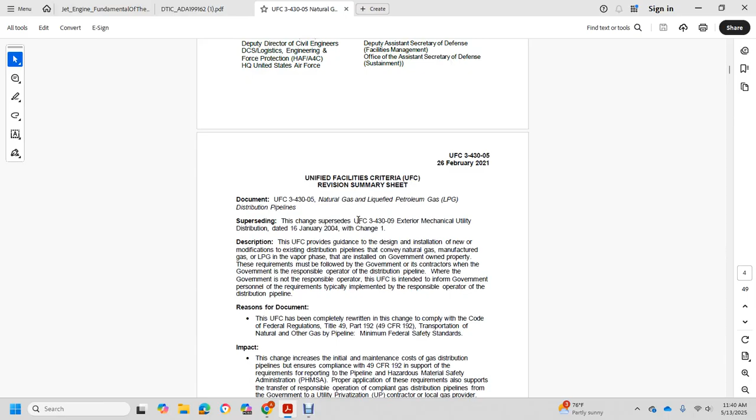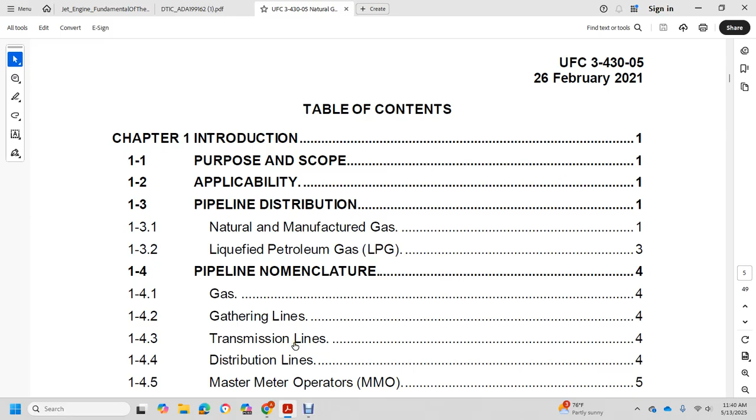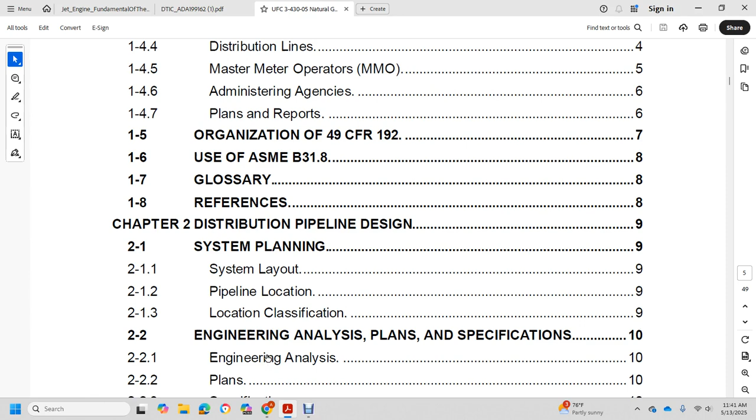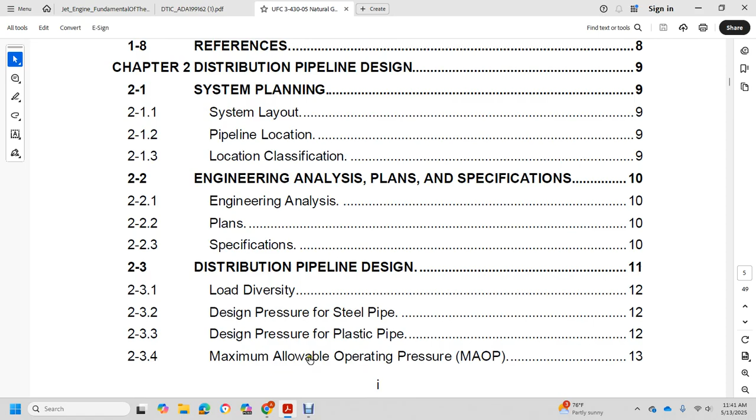Chapter 1. Introduction, Purpose, Scope, Applicability, Pipeline Distribution, Natural and Manufactured Gas, Liquefied Petroleum Gas, Pipeline Nomenclature, Gas Gathering Lines, Transmission Line, Distribution Lines, Master Meter Operators, Administering Agencies, Plan Reports. 1-5 Organization of Title 49 CFR 192, Use of American Society of Mechanical Engineers B31.8, and Glossary, References. Chapter 2, Distribution Pipeline Design, System Planning, System Layout, Pipeline Location, Location Classification, Engineering Analysis, Plan Specification, Distribution Pipeline Design, Load, Diversity, Design Pressure for Steel Pipe.

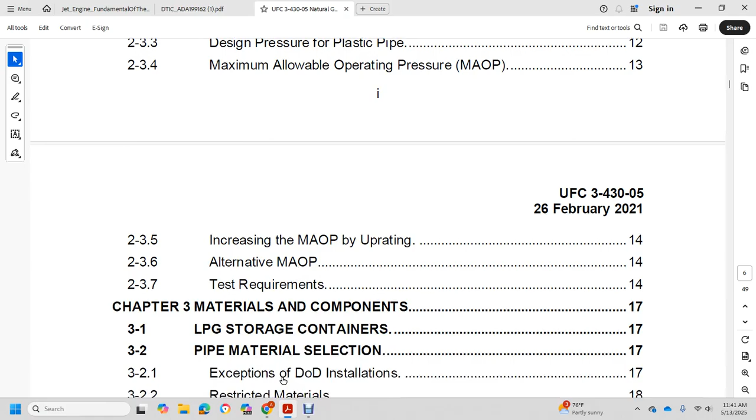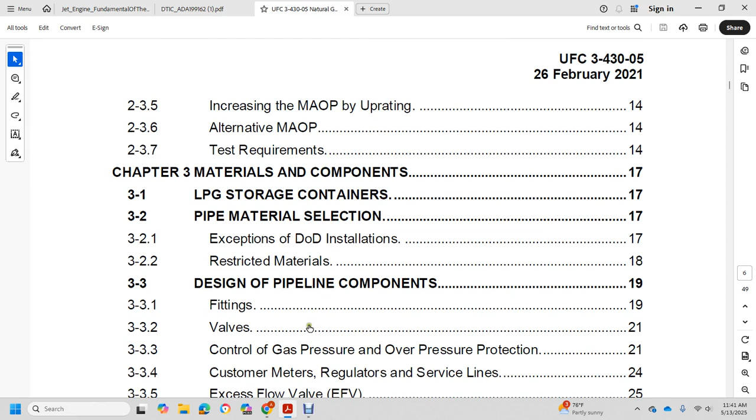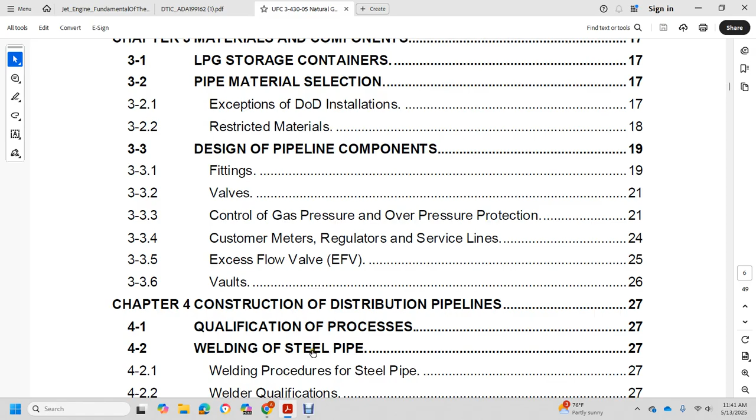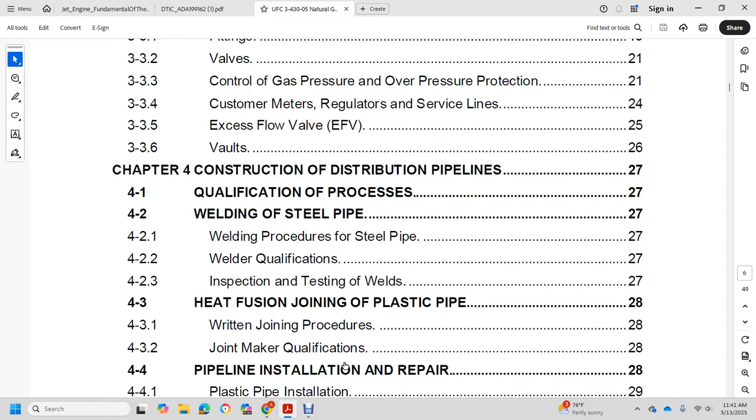Design Pressure for plastic pipe, Maximum Allowable Operating Pressure, Increase of the maximum allowable operating pressure by uprating, alternative maximum allowable operating pressure, test requirements. Chapter 3, Material Components, Liquefied Petroleum Gas Storage Container Pipeline Material Selection, Exceptions of DoD Installations, Restricted Materials Design, Pipeline Components, Fittings, Valves, Control Gas Pressure, Overpressure Protection, Customer Meters, Regulators, Service Lines, Excess Flow Valves, Vaults. Chapter 4, Construction, Distribution Pipelines, Qualification Process, Welding of steel pipe, Welding Procedure, Steel Pipe, Welder Qualifications, Inspection and Testing of welds, Heat Fusion Joining, Plastic Pipe, Written Joining Procedures, Joint Maker Qualification.

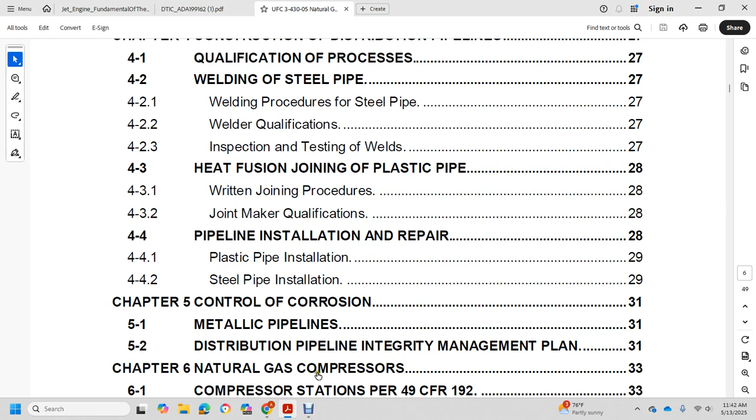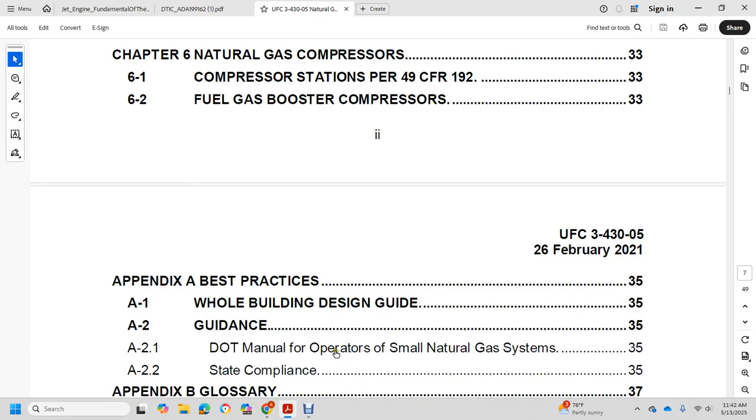Pipeline Installation and Repair, Plastic Pipe Installation, Steel Pipe Installation. Chapter 5, Control of Corrosion, Metallic Pipelines, Distribution Pipeline Integrity. Chapter 6, Natural Gas Compressor Stations, per 49 CFR 192, Fuel Gas Booster Compressors. Appendix A, Best Practice, Whole Building Design Guidance and DOT Department of Transportation Manual Operator Small Natural Gas System State Compliance. Appendix B, Glossary, Acronyms, Appendix C, References and Figures.

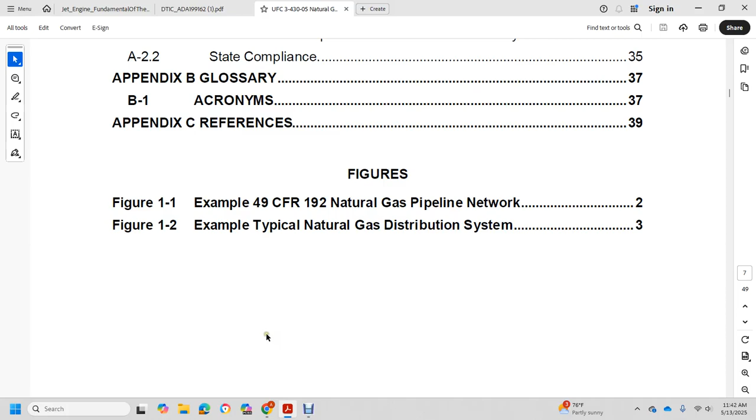Example for Title 49 CFR 192 Natural Gas Pipeline Network. Example of Typical Natural Gas Distribution System.

This page is intentionally left blank.

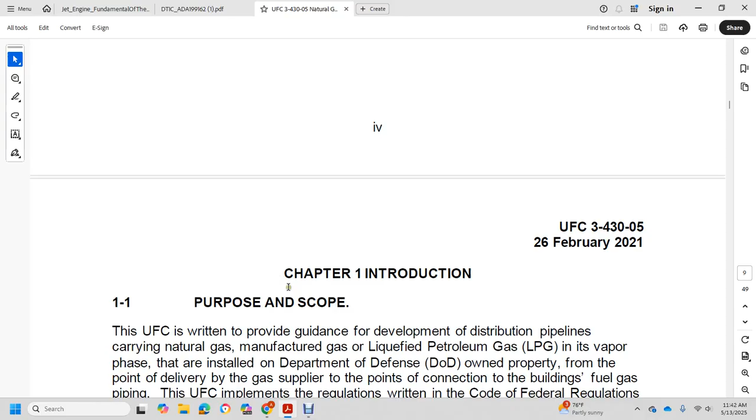Chapter 1, Introduction, Purpose, and Scope. This UFC is written to provide guidance for development of distribution pipelines carrying natural gas, manufactured gas, and liquefied petroleum gas as vapor phase. They are installed on Department of Defense owned property, from the point of delivery of the gas supply to the point of connection to building fuel gas piping.

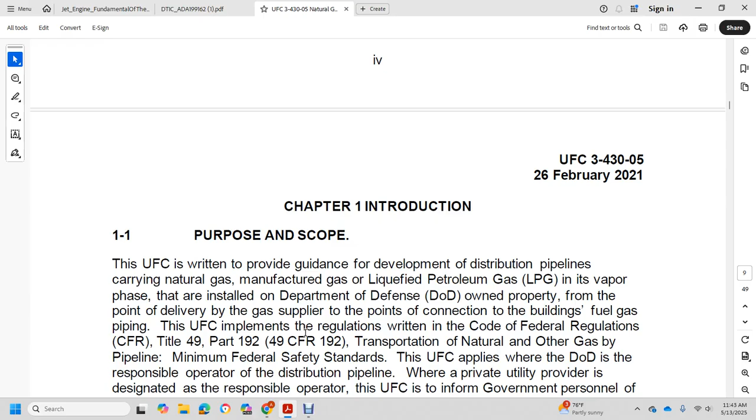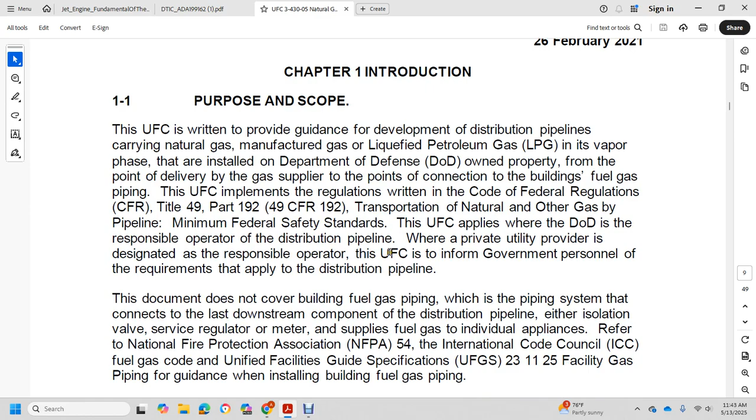This UFC implements regulation within the Code of Federal Regulations, Title 49, Part 192, Transportation of Natural and Other Gas by Pipeline, Minimum Federal Safety Standards. The UFC, as applied within DoD, is for the responsible operator of distribution pipelines, where a privately owned utility provider is designated as the responsible operator. This UFC is intended to inform government personnel of the requirements applicable to distribution pipeline documents.

It does not cover building fuel gas piping systems that connect the last downstream component of a distribution pipeline, either an isolation valve, service regulator, or meter, to supply fuel gas to individual appliances. Reference National Fire Protection Association 54, International Code Council ICC Fuel Gas Code, and Unified Facility Guide Specifications 23 11 25 Facility Gas Piping for guidance when installing fuel gas piping.

This document does not cover systems used to convey liquefied petroleum gas in its liquid phase. Refer to Title 49 CFR 195 and UFC 3-460-01 for liquid phase liquid petroleum gas pipeline transfer systems, and to National Fire Protection Association 58, International Code Council Fuel Gas Code, and Unified Facility Guide Specification 23 11 25 Facility Gas Piping for guidance when installing a single liquid petroleum gas storage tank or liquid petroleum gas service to a single building.

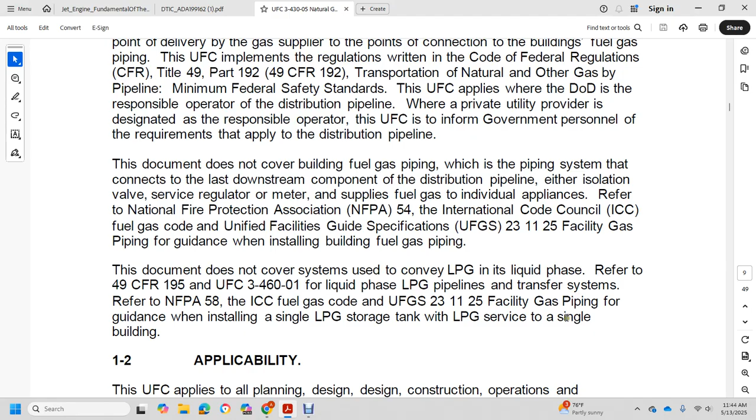1-2 Applicability. The UFC applies to all planning, design, construction, operation, and maintenance of gas distribution pipelines and all appurtenances wherever the DoD is the responsible operator.

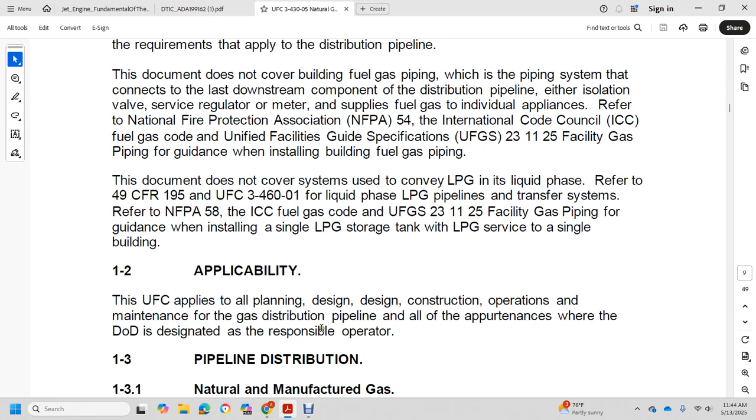1-3 The pipeline distribution. 1-3-1 Natural gas and manufactured gas. Regulation Title 49 CFR 192 applies to every part of the gas pipeline, from the point of gas production to connection with the service line components of the building fuel gas piping system. An electronic version of Title 49 CFR 192 can be found on the electronic CFR website.

Under Title 49 CFR 192, three distinct types of pipeline are described: gathering pipelines, transmission pipelines, and distribution pipelines. See Figure 1-1 for a graphical representation of Title 49 CFR 192 natural gas pipeline systems.

Gathering pipelines are not under the authority or scope of the UFC. Transmission pipelines are typically owned and operated by gas suppliers and not covered by this UFC, though transmission lines installed on Department of Defense installations are under easement with the Department of Defense to a responsible owner.

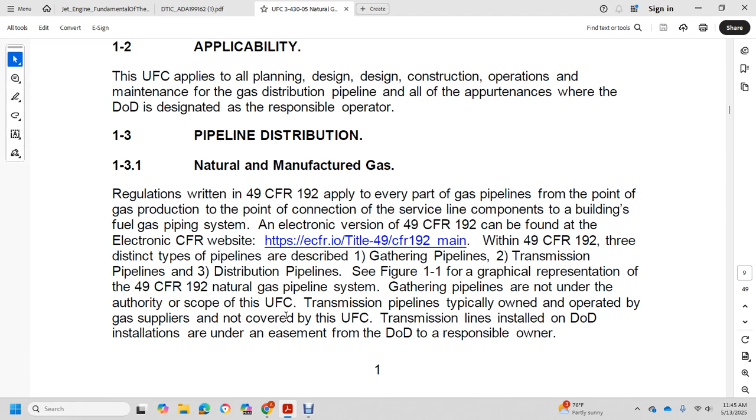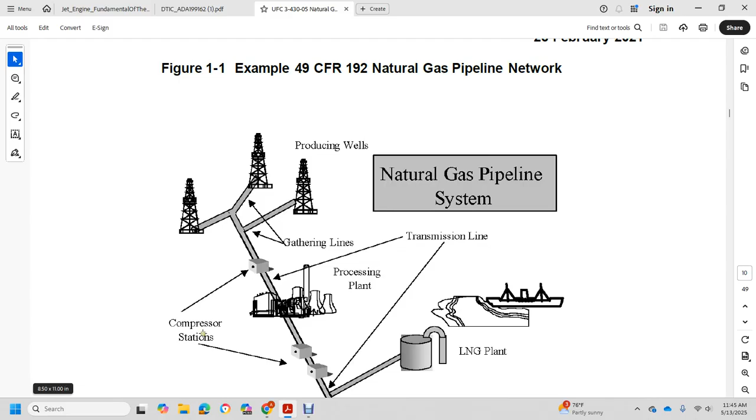Example of Title 49 CFR 192 natural gas pipeline: production wells, gathering lines, natural gas pipeline transmission lines, processing plant, compressor stations, liquid natural gas plant, underground storage, city gate, large volume customer, distribution system meters, and regulators.

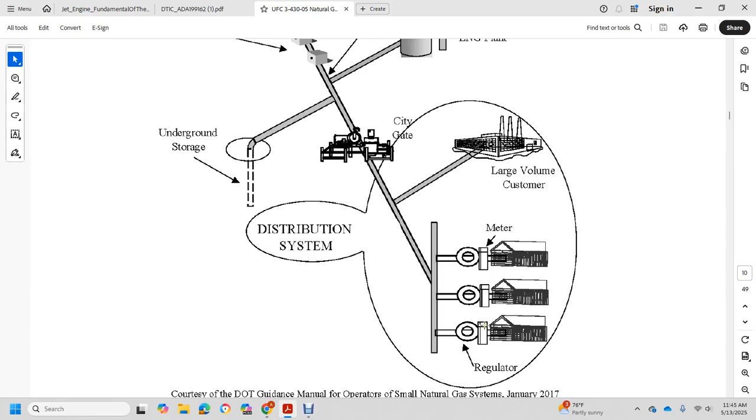Gas pipelines for which the Department of Defense is the responsible operator are typically classified as distribution pipelines. characterized as a pipeline that receives gas from a gas utility purveyor who delivers, meters, and regulates the pressure of gas supplied to the distribution pipeline located on the Department of Defense installation.

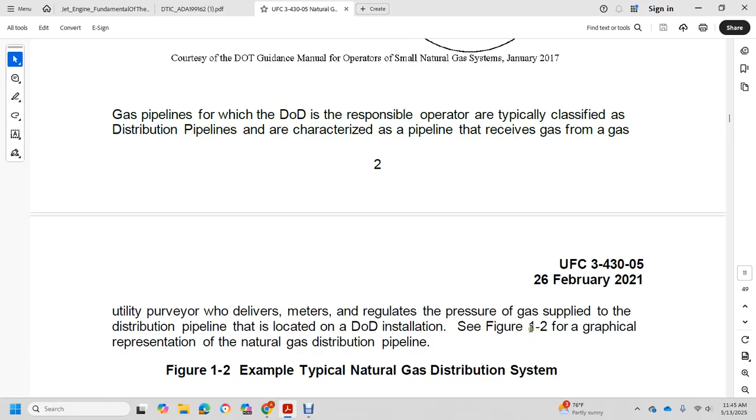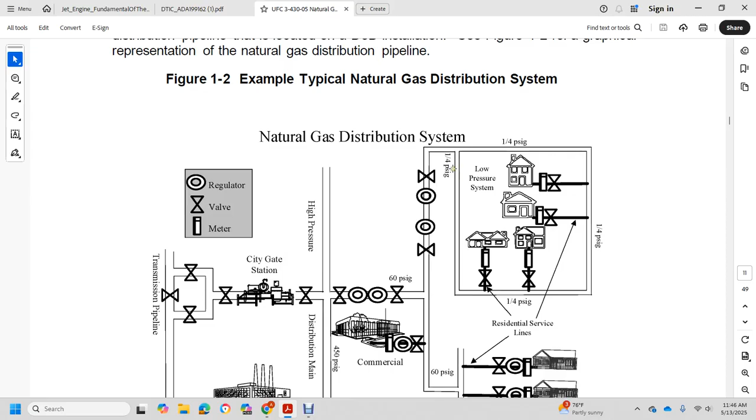1-3-2 Liquefied petroleum gas, or LPG. Title 49 CFR 192 applies to liquid petroleum gas distribution pipelines conveyed in liquid petroleum gas vapor phase. The pipeline conveying liquid petroleum gas in liquid form is not covered under Title 49 CFR 192, but is regulated under Title 49 CFR 195.

Transportation of hazardous liquids by pipeline, Title 49 CFR 195, 195.1(b)(1), provides an exception to applicability for any hazardous liquid transported in a gaseous state. This exemption implements by default Title 49 CFR 192 as the regulating document. Title 49 CFR 192.11 refers to the vapor phase with liquid petroleum gas.

Petroleum gas pipelines are regulated under Title 49 CFR 192 and National Fire Protection Association 58, with National Fire Protection Association 58 prevailing in the event of conflict.

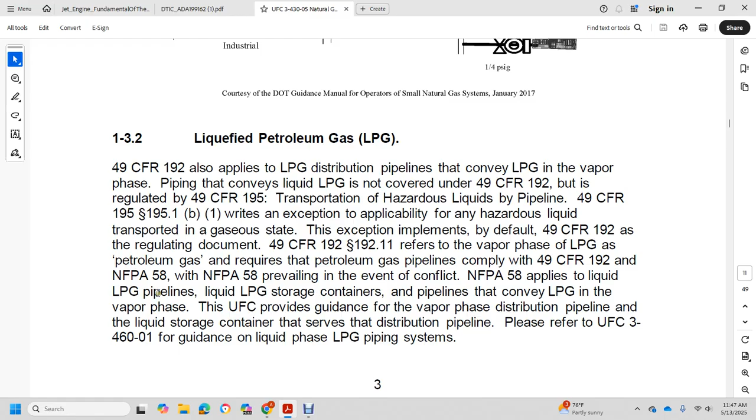National Fire Protection Association 58 applies to liquid petroleum gas, liquid petroleum storage containers, pipeline conveyed liquid petroleum gas in the vapor phase. This UFC provides guidance on vapor phase distribution pipelines and liquid storage containers that serve the distribution pipeline. Please refer to UFC 3-460-01 for guidance on liquid petroleum gas piping systems.

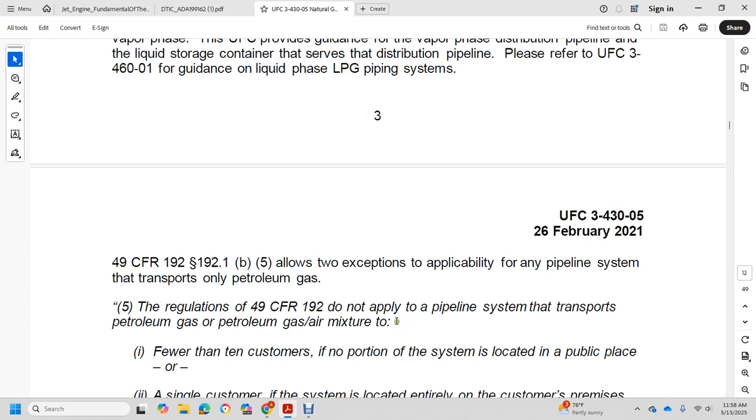Title 49 CFR 192.1 B5 allows two exemptions of applicability for any pipeline system that transports only petroleum gas. The regulations of Title 49 CFR 192 do not apply within a pipeline to a pipeline system that transports petroleum gas-air mixture to fewer than 10 customers, if no portion of the system is located in a public place, or a single customer and single system located on the customer's premises, regardless of whether the system is located in a public place.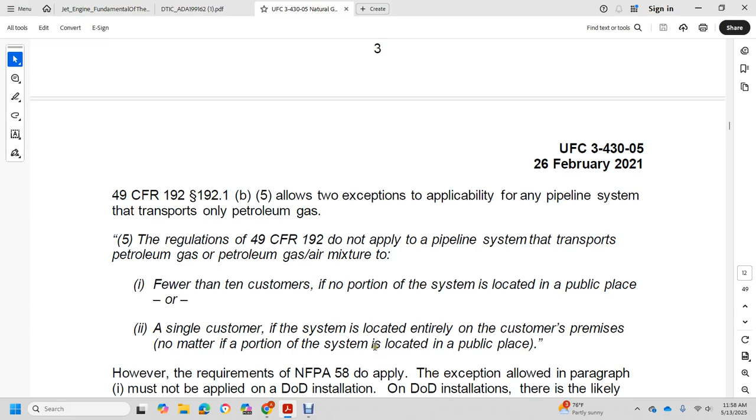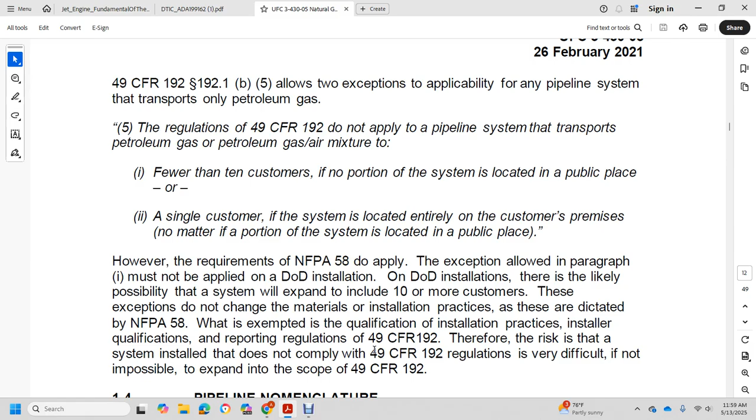However, the requirement to apply the National Fire Protection Association exemption in paragraph 1 must not be applied to DoD installations. On DoD installations, there is a likely possibility the system will expand to include 10 or more customers. These exceptions do not change the material or installation practices dictated by NFPA 58. The exceptions for qualification, installation practices, installer qualification, and reporting regulations remain under Title 49 CFR 192. Therefore, if a system installed does not comply with Title 49 CFR 192 regulation, it is very difficult, if not impossible to expand the scope under Title 49 CFR 192.

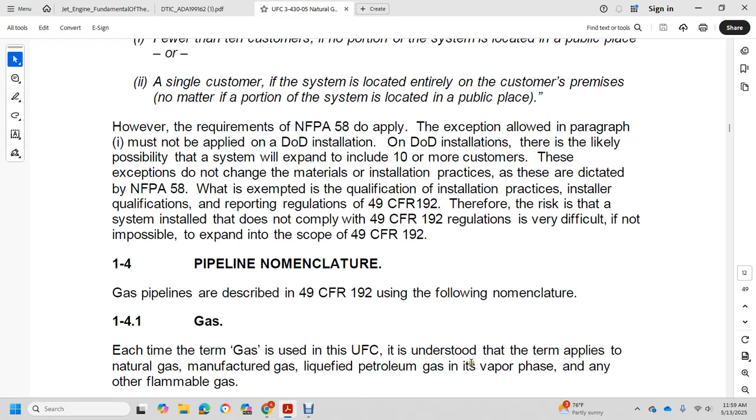Section 1.4 covers pipeline nomenclature. Gas pipelines are described in Title 49 CFR 192 with the following nomenclature. 1.4.1 Gas: each time the term gas is used in the UFC, it applies to natural gas, manufactured gas, liquefied petroleum gas in its vapor phase, and any other flammable gas. 1.4.2 Gathering lines: these transport gas from the gas production facility.

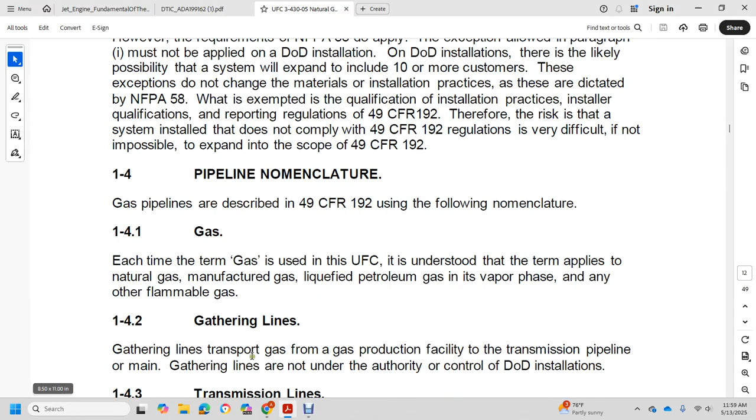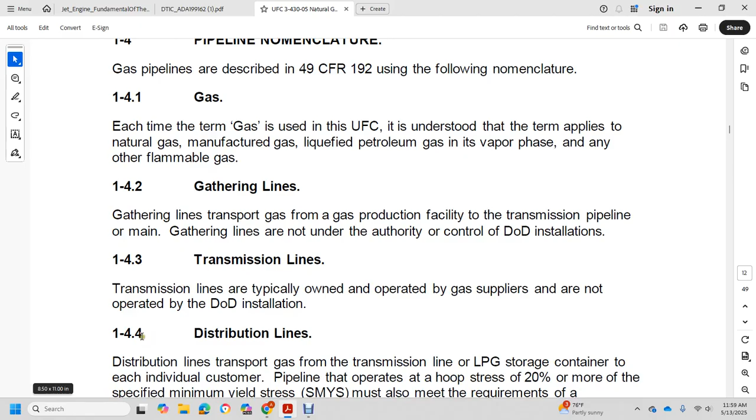Transmission lines remain under the authority, while gathering lines are not under the authority or control of the Department of Defense installation. 1.4.3 Transmission lines are typically owned and operated by the gas supplier and not operated by the DoD installation. 1.4.4 Distribution lines transport gas from the transmission line or liquefied petroleum gas storage container to each individual customer.

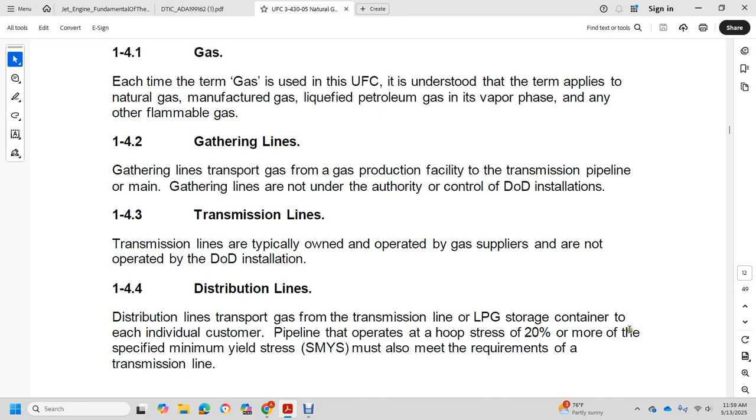A pipeline that operates at a hoop stress of 20% or more of the specified minimum yield stress must also meet the requirements of a transmission line. 1.4.4.1 Main: a main is defined as a distribution line serving more than one service line.

Note that Title 49 CFR 192 subpart G appears to apply to transmission pipelines, because it is entitled 'General Construction Requirements for Transmission Lines and Mains.' However, the Title 49 CFR 192 scope of the mains requirement applies to distribution pipelines.

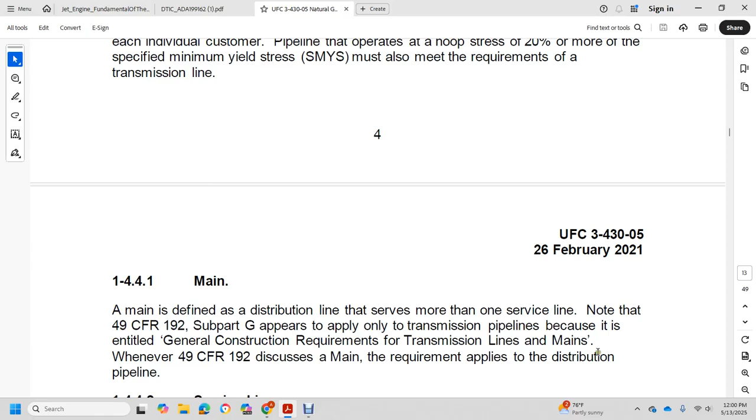1.4.4.2 Service line: a service line is a distribution line that transports gas from the main to the individual customer meter, regulator, or isolation valve upstream of the customer piping. Note that this pipe point of connection is the demarcation between the pipeline governed by Title 49 CFR 192 and the fuel gas piping governed by the National Fire Protection Association 54.

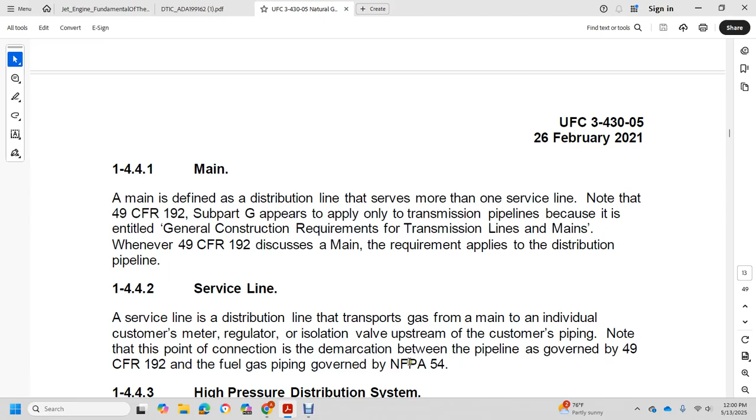1.4.4.3 High pressure distribution system: a distribution system operated with gas pressure in the main higher than the pressure provided to the customer. 1.4.4.4 Low pressure distribution system: a distribution system operated with gas pressure in the main substantially the same as the pressure provided to the customer. Refer to Title 49 CFR 192 §195.3 for the official definitions of each of these terms.

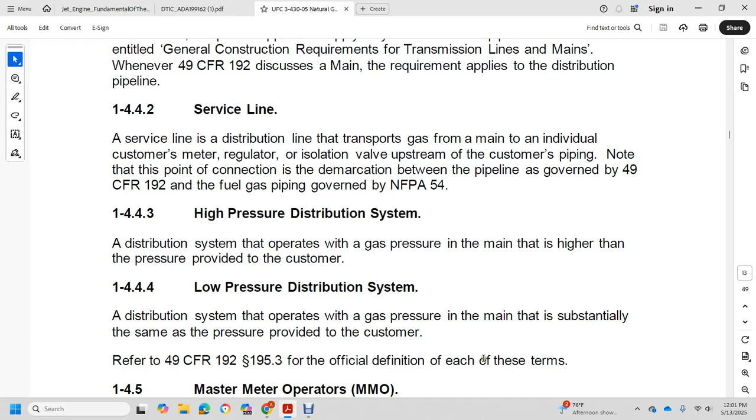1.4.5 Master meter operator: a small natural gas distribution system, sometimes designated as a master meter system. This designation is typically reserved for owners of apartments, buildings, trailer parks, or other types of property. Meaning, Title 49 CFR 192 refers to the MMO, the operator of the master meter system, but does not provide clearly defined criteria for determining who is and who is not an MMO or master meter operator under the reporting regulation.

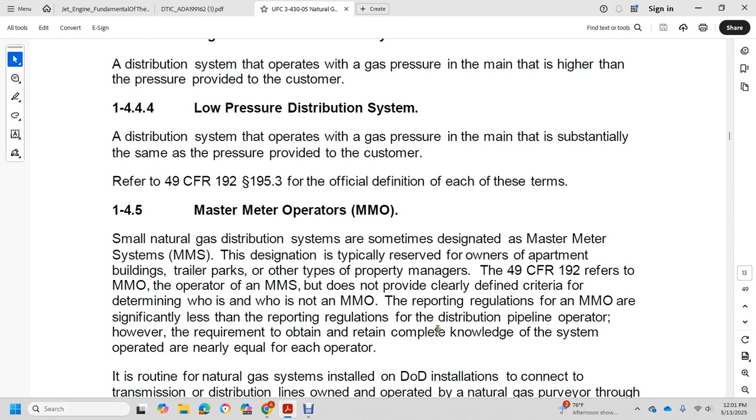The master meter operator has significantly less reporting regulation than a distribution pipeline operator. However, the requirement to obtain and retain complete knowledge of the system operated is nearly equal for each. The transmission natural gas system installed at a DoD installation connects with transmission and distribution lines owned and operated by a natural gas purveyor through a metered and pressure-regulated connection. Because of this method of connection, with limited reporting, engineers or contractors operating the system sometimes attempt to claim the natural gas distribution system is a master meter system. No natural gas systems installed at a DoD installation shall be considered a master meter system without express written approval from the authorized administrator of the applicable regulation.

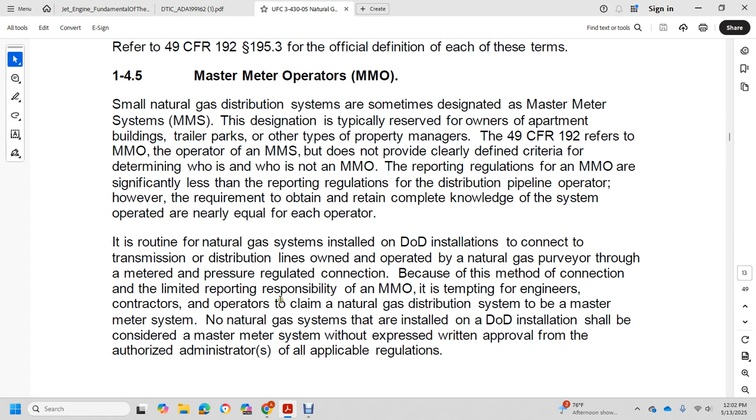1.4.6 Administering Agencies: the Pipeline and Hazardous Materials Safety Administration is assigned, with the Administrator under Title 49 CFR 192 tasked with enforcing the regulations presented therein. Transmission line operators and distribution line operators are required by regulation to report specific information to the Pipeline and Hazardous Materials Safety Administration, with the reporting regulation being more detailed for transmission line operators than for distribution line operators.

Nonetheless, the distribution line operator is required to report to PHMSA. The report requires the pipeline operator to obtain and retain complete knowledge of each pipeline segment and component installed in the system. The operator is responsible for details of the plans, procedures, and reports, which must be available for PHMSA review of the distribution pipeline as defined in Title 49 CFR 192, subparts L and P.

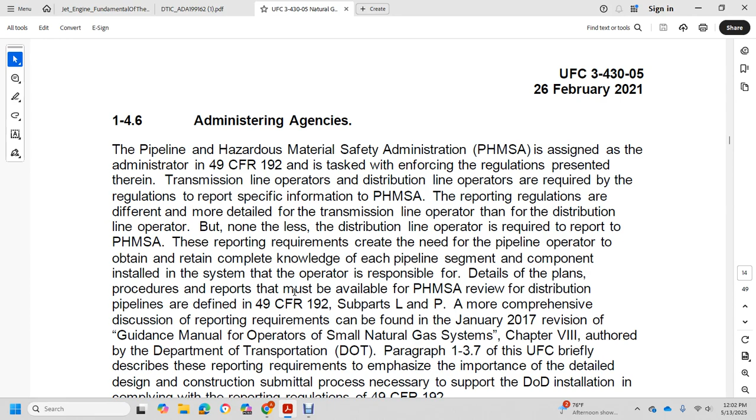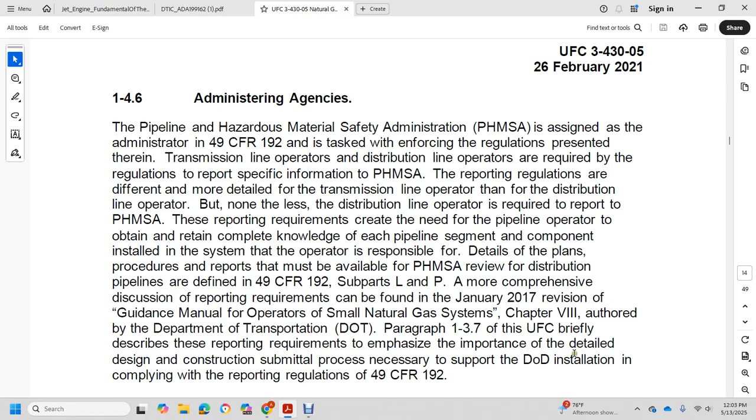A more comprehensive discussion of reporting requirements can be found in the January 2017 revision of the Guidance Manual for Operators of Small Natural Gas Systems, Chapter 8, authored by the Department of Transportation, paragraph 1-3.7, which briefly describes the reporting requirements and emphasizes the importance of detailed design and construction submittal processes necessary to support DoD installations complying with the reporting regulation Title 49 CFR 192.

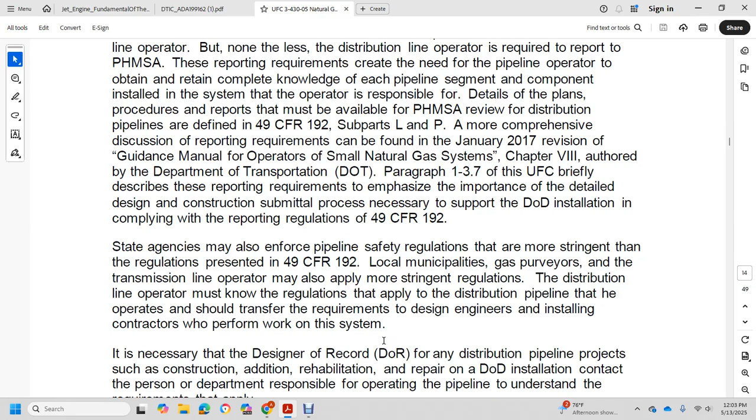State agencies may also enforce pipeline safety regulations more stringent than those presented in Title 49 CFR 192. Local municipality gas purveyors and transmission line operators may also apply more stringent regulations. Distribution line operators must know the regulations that apply to the distribution pipeline and should transfer these requirements to design engineers and installing contractors who perform the work on the system.

It is necessary for the Designer of Record of any distribution pipeline project, such as construction, addition, rehabilitation, or repair, for the DoD installation to contact the person or department responsible for operating the pipeline to understand the requirements that apply.

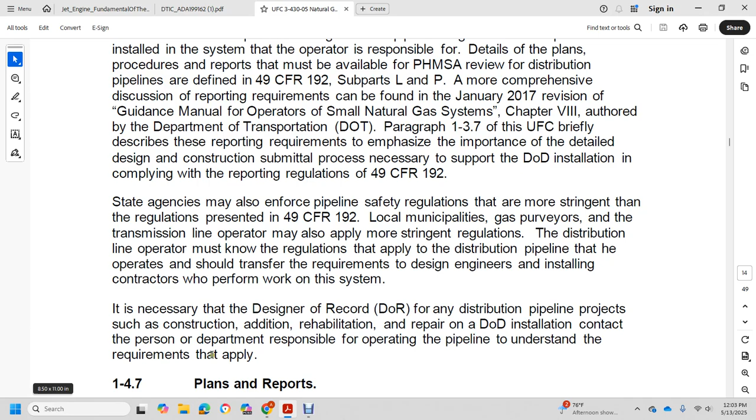1-4.7, Plans and Reports. All gas pipeline operators are required to maintain a number of plans for the safe operation of the pipeline. These contain information relevant to the work performed on the gas distribution pipeline. Civil Department of Defense installations must provide a reasonable record of the design and construction process in order to support ongoing plan reporting efforts required for the responsible operator and the Department of Public Works.

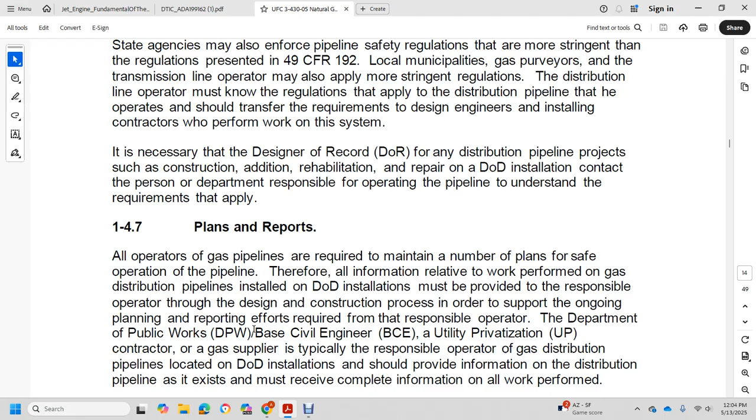A base civil engineer utilizing a privatization contractor as the gas supplier is typically responsible for operating the gas distribution system located on the Department of Defense installation, and should provide information on the distribution pipeline as it exists, receiving complete information on all work performed. Plans required for the distribution pipeline operator are listed below to indicate the necessary thoroughness of the information that must be made available.

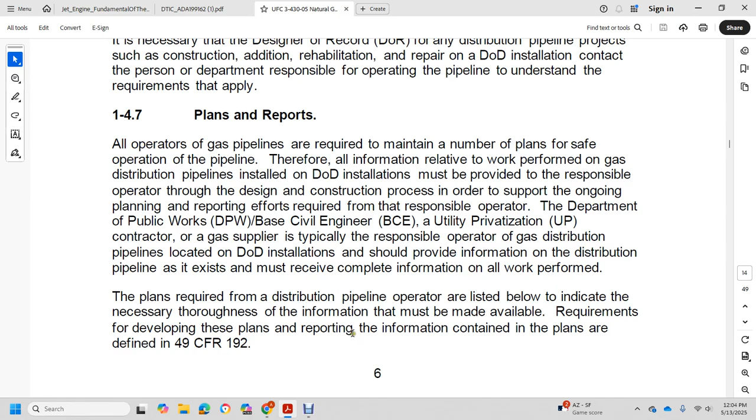The requirements to develop these plans and report the information contained within them are defined in Title 49 CFR 192. Operating and maintenance plans, Parts L and M, consist of 27 procedures covering all aspects of installing, operating, and maintaining each pipe segment component.

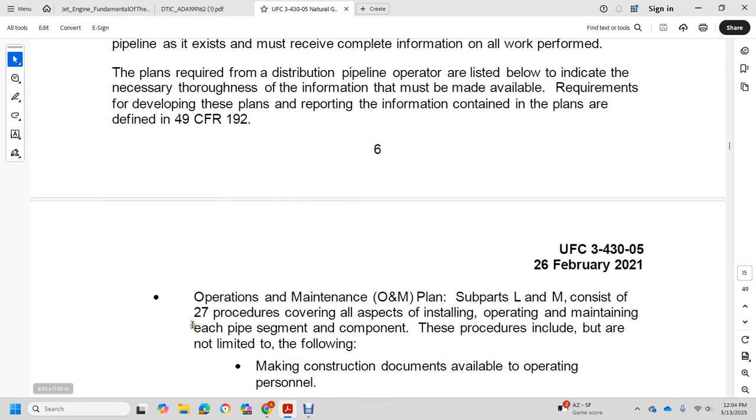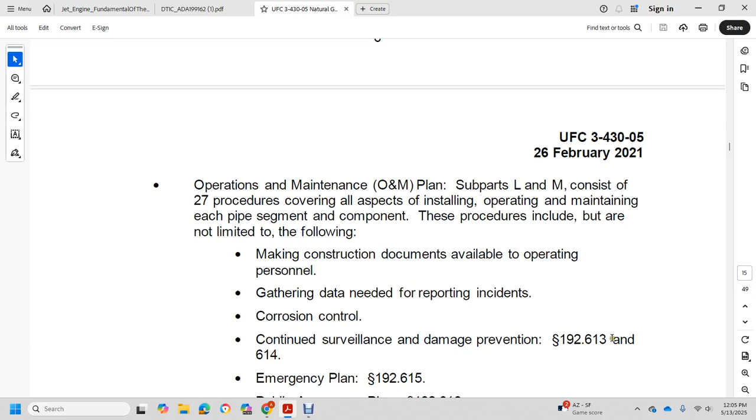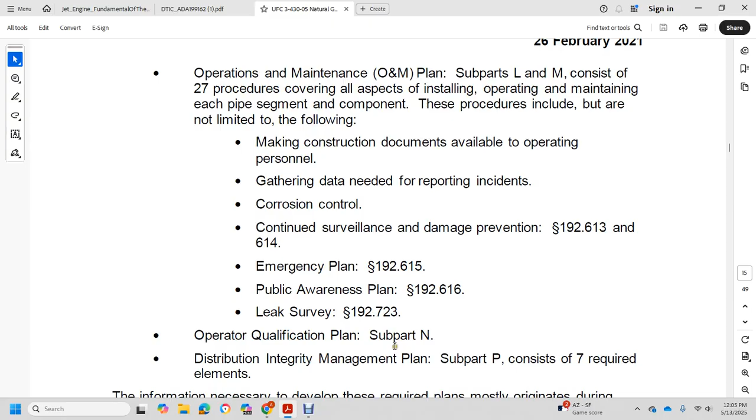Procedures include, but are not limited to, the following: making construction documents available to operating personnel, gathering data needed to report incidents, corrosion control, continued surveillance, damage prevention (192.613, 614), emergency plan (192.615), public awareness plan (192.616), leak survey (192.723), operator qualification plan (Subpart N), and distribution integrity management plan (Subpart P).

Subpart P consists of 7 required elements with information necessary to develop. These required plans must be originated with the design and construction of each segment of the pipeline. Therefore, the construction plan specifications developed by the Designer of Record must include appropriate system design and testing parameters, and requirements for the installation contractor to submit necessary information including location, materials, equipment, installation procedures, personnel qualifications, and testing results for the Department of Defense installation to develop and maintain the required plans and procedures.

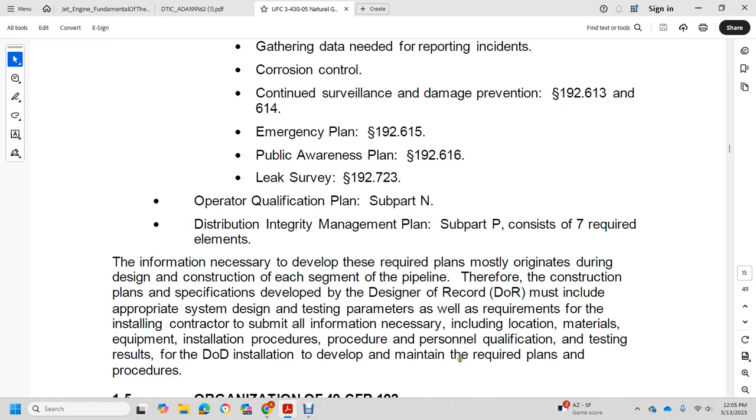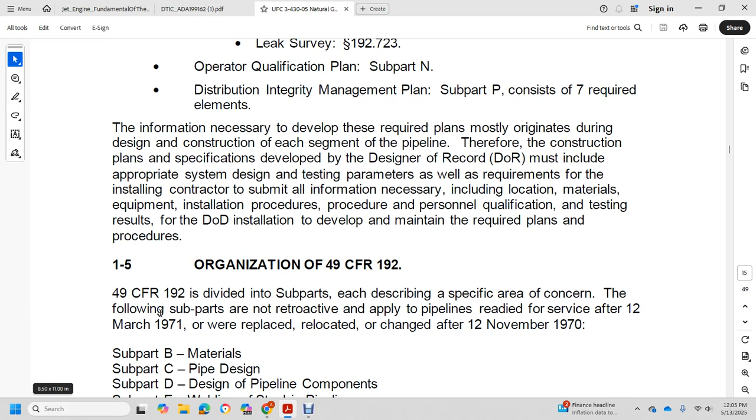1.5, Organization of Title 49 CFR 192. Title 49 CFR 192 provides subparts that describe specific areas of concern. The following subparts are non-retroactive, applying to pipelines ready for service after March 12th, 1971, or replaced, relocated, and changed after November 12th, 1970.

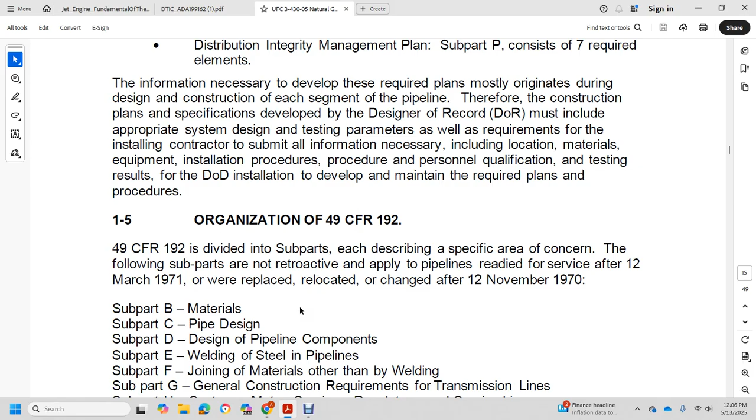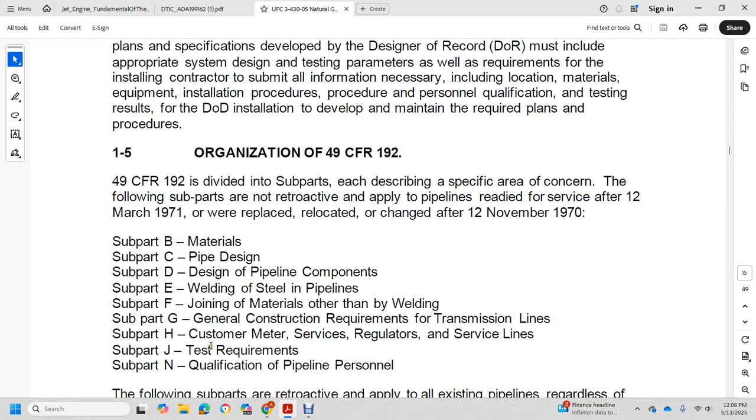Subpart B, materials. Subpart C, pipe design. Subpart D, design of pipeline components. Subpart E, welding of steel pipelines. Subpart F, joining of materials other than welding. Subpart G, general construction requirements for transmission lines. Subpart H, customer meter, services, regulators, and service lines. Subpart J, test requirements. Subpart N, qualification of pipeline personnel.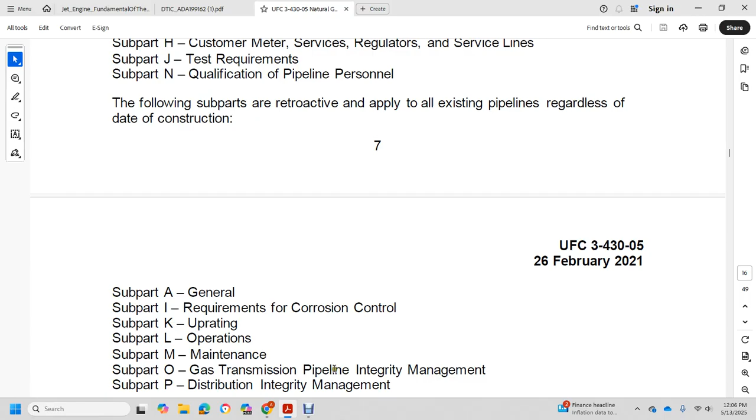The following subparts are retroactive, applying to all existing pipelines regardless of the date of construction. Subpart A, general. Subpart I, requirements for corrosion control. Subpart K, uprating. Subpart L, operations. Subpart M, maintenance. Subpart O, gas transmission pipeline integrity management. Subpart P, distribution integrity management.

1.6, Use of ASME B31.8. For pipelines, the Department of Defense installation must comply with the requirements of Title 49 CFR 192, comparable to the industry standard ASME B31.8 for gas transmission and distribution piping systems. Although ASME B31.8 may appear to be an acceptable piping code,

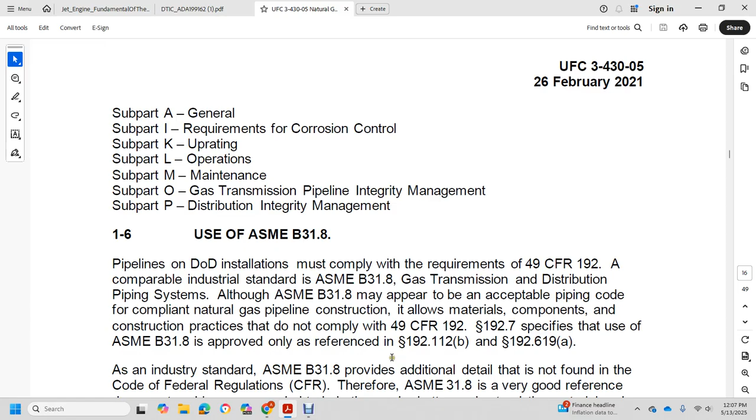compliance with natural gas pipeline construction allows materials and component construction practices that do not comply with Title 49 CFR 192. 192.7 specifies that ASME B31.8 is approved only as referenced in 192.112B and 192.619A. As an industry standard, ASME B31.8 provides additional detail not found in the Code of Federal Regulations. Therefore, ASME B31.8 is a very good reference document, recommended to help the reader better understand the material and construction practices available to the natural gas industry.

With Title 49 CFR 192 as the defining requirement document, decisions made from information presented in ASME B31.8 must be confirmed to comply with the requirements of Title 49 CFR 192.

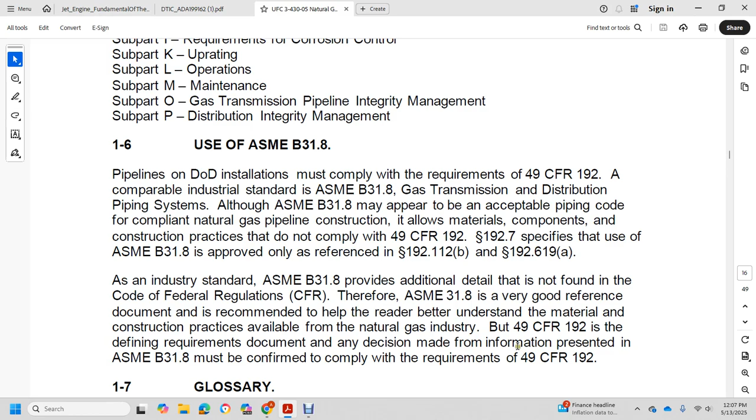1.7, Glossary. Appendix B contains acronyms, abbreviations, and terms. 1.8, References. Appendix C contains a list of references used in this document. Publication dates of codes and standards are not included in the document unless otherwise specified; the most recent edition of the referenced publication applies.

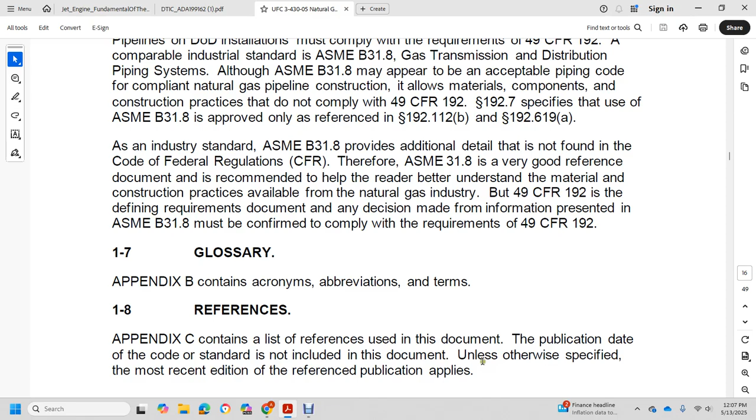Chapter 2, Distribution Pipeline Design.